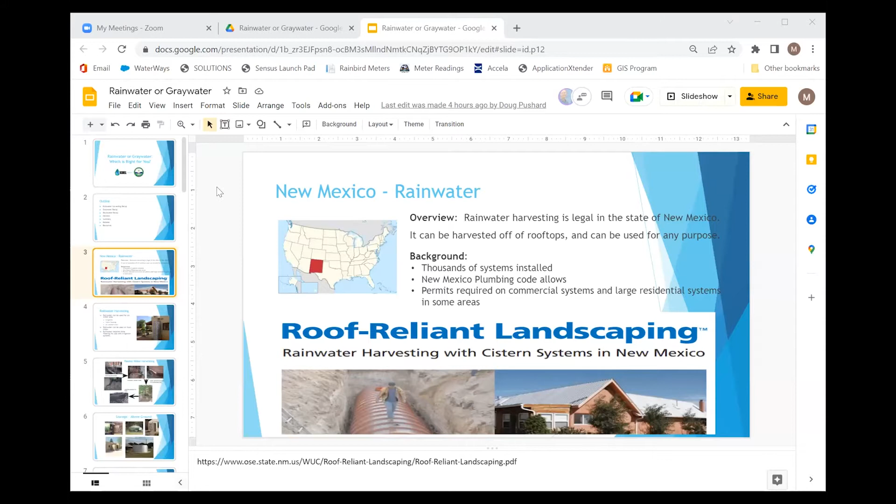My computer, can you hear me? Okay, I need to use my phone, Megan. Oh, I'm sorry, your audio is not coming through very clearly right now. I would suggest using your phone. Is that better? Oh, hold on, yes it is. If we can get rid of the echo. There we go, yes, the echo was on my side. Sorry. Okay, so would you like me to pull up the presentation, Doug? Yeah, I think it's going to be better that way, Megan, please. Okay, will do. And I apologize, we did this presentation on Thursday night, but we had a little timing issue in that we have the President of the United States here in Santa Fe, New Mexico, headed down your way, and when an event like that happens the bandwidth goes away. So we're having a bandwidth issue. So we'll start off.

Graywater, Rainwater, which is right for you. Megan, next slide, please.

We are going to talk, as Megan said, about rainwater. We're going to give a quick overview. We're going to talk about graywater. We are also going to talk about blackwater, even though it was not in the title of the session, because it's an important water reuse. We'll talk about the decision process summary, and then Megan will come back and talk about the programs, what's called rebates here, but what the programs are available to you if you're living in their service area. And then we'll finish up with resources and have time for questions.

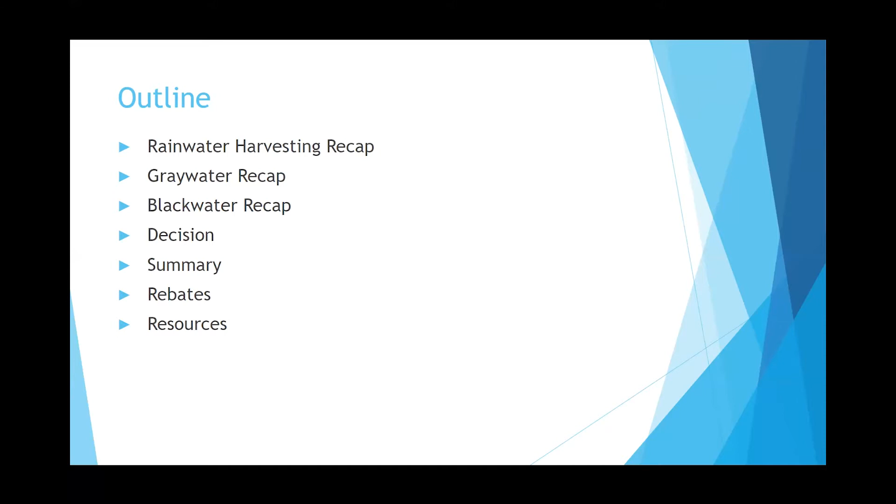Okay, New Mexico. We are very, very fortunate in New Mexico. I will repeat that statement. We are probably the best in the country when it comes to reuse regulations.

And rainwater, we start with rainwater. Rainwater is legal in the state, and we can use it in all various forms, for various uses. Of course, irrigation is the one that we all think about, but we have thousands and thousands of homes that rely on rainwater as their only source of water. They have no city water, no well water, only rainwater. We've got hundreds and hundreds of homes up in Taos, which gets about 7 inches of rain a year, for all their house use. So they're indoor, they're toilet flushing, bathing, dishes, as well as using irrigation. So we can use rainwater in all forms and fashions.

The roof-reliant landscaping that you see here on the bottom of the slide, that is one of the resources available to us in the state. It's published by the state, the Office of the State Engineer. We'll give you a link to it at the end of the presentation, but it's a valuable resource if you're thinking about doing larger rainwater systems. There are lots of resources, but that's a really good guide, and it's free.

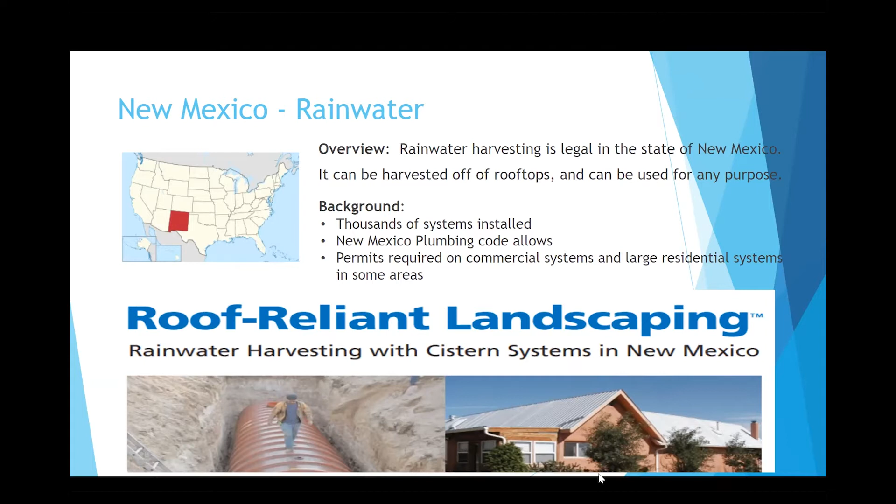As I mentioned, it can be used for all uses. The case study we're going to talk about a little bit later uses it for all indoor water. The reason why I emphasize that is because the water quality of rainwater is much greater than the quality of well water throughout most of the state. I have lots of clients where we'll do a well test and a rainwater test, and they'll always pick rainwater - there's no mineral in the rainwater whatsoever, and very little dirt coming off the roof into the tanks, so it actually is very clean.

It's very easy to use for toilet flushing if you can - it's a great source of water for that, but of course the primary use is irrigation. One of the questions we always get is, is rainwater safe for plants? The answer is yes, it's actually a great water source for irrigation, but it has no nutrients in it whatsoever. So if you're going to water a tomato plant strictly with rainwater, that plant will actually need fertilizer, because there is none in that water, versus other forms of water we'll talk about which do have nutrients.

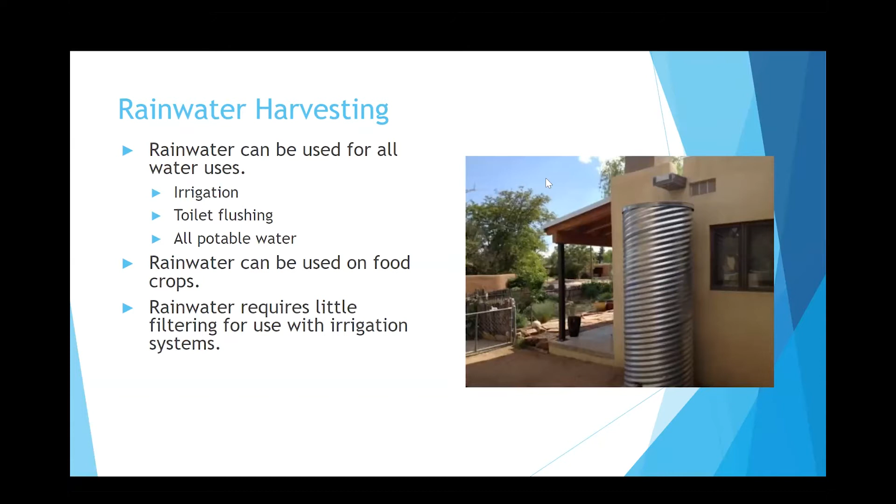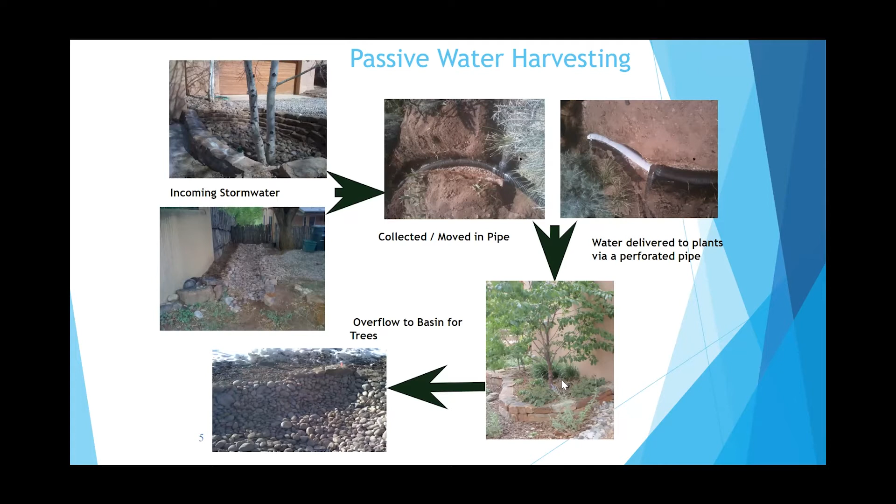You may do this with an irrigation system and then put plants like fruit trees where you want to give them extra water, or cottonwood trees where you want to give them extra water.

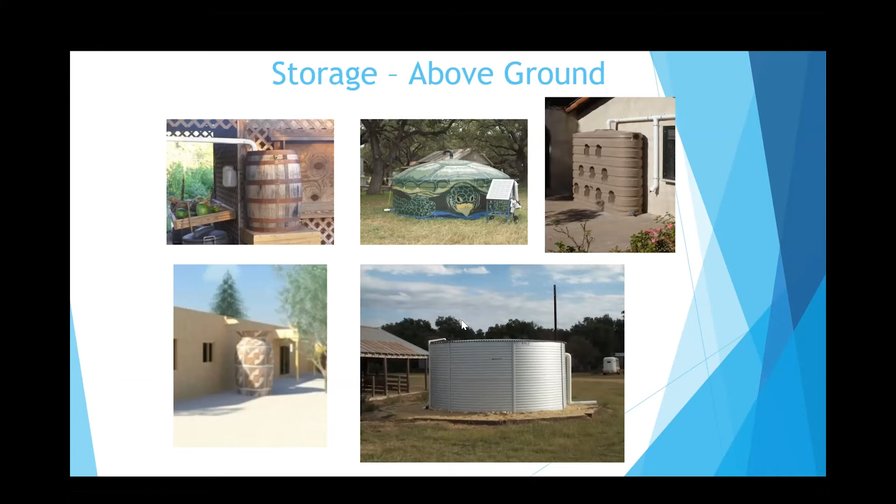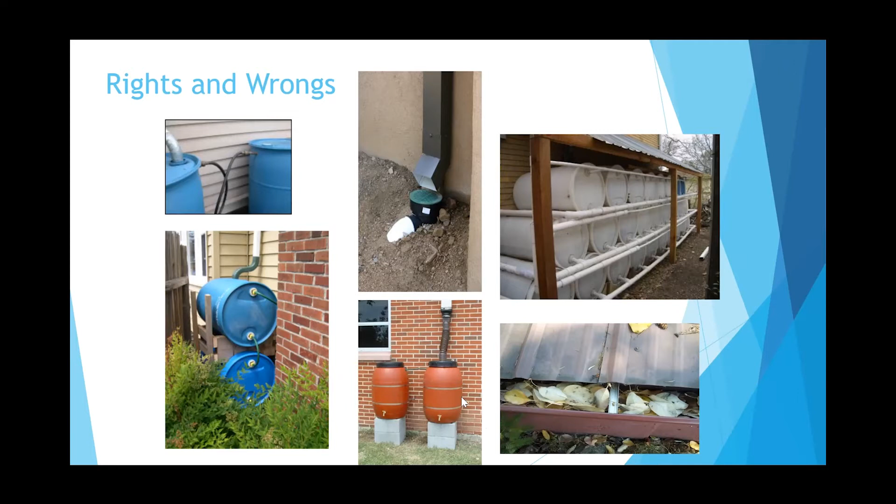The math behind rainwater systems is very simple. The number is 0.623—that's the amount of gallons you can catch per square foot of roof. You multiply that by your roof size, then multiply it by the rain you're able to get. So if we're taking a 12-inch annual normal and a 2,000 square foot roof, we're talking about almost 15,000 gallons. If we're looking at about 7 inches of rain, we're talking about 9,000 gallons—still a good amount of water. That amount of water, if it's 14,000, is probably going to last you 2 months of irrigation watering.

That's for a yard without grass. But that water is not going to be all available to you. Some of it will be lost due to inefficiencies in the systems—the type of downspouts you have, the type of roof, and if you have any guttering with leaks, you're going to lose some of that water. So you should always plan on capturing about 90% if you've got a good conveyance system to wherever you're going to take the water.

Now, I say square footage of roof—it's important to know that square footage could be a portal. In fact, greenhouses will sometimes drape plastic between them and catch rain off that plastic, channeling it to where they want to store the rainwater. So it doesn't have to be your house. It can be a portal, it can be wind shears, it could be plastic to help you capture that water. It doesn't need to be an expensive dwelling. In fact, the case study I'm going to show you in a few minutes, almost half the roof space is a portal. So it doesn't have to be the roof, but it has to be some structure that you're able to capture and harvest that water off of.

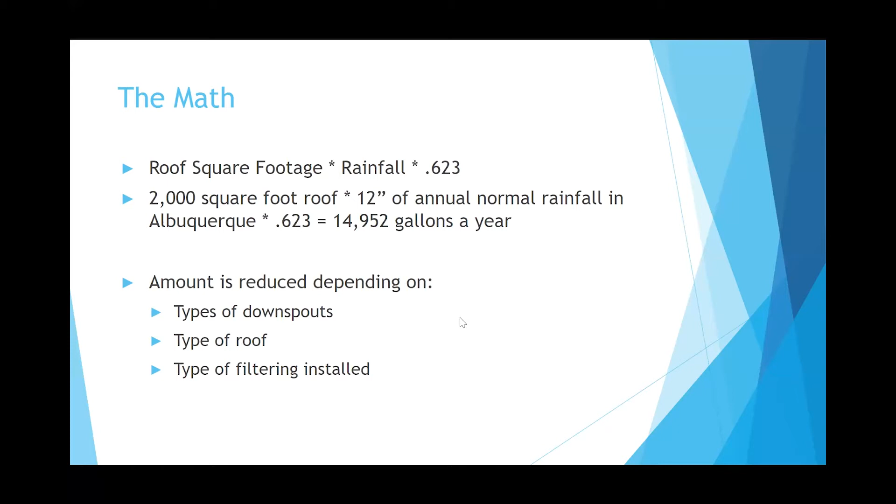Pros and cons: rainwater's biggest pro is that it is very, very clean. As I mentioned early on, when we're doing water tests of rainwater versus well water, rainwater is not even close—there's no minerals in it. Typically off a new roof, depending on the roof type, you may have some roofing material that gets into the rainwater, but over time the roof gets cleaned off. You'll have dust, but that dust is so minuscule compared to the amount of water, it doesn't really leach much into the rainwater.

It can be done inexpensively, and that's probably a key point. As I mentioned in some of the examples, I have clients capturing it off plastic tarps, so it does not have to be an expensive proposition.

As Megan mentioned, making your own rain barrels is a workshop I've done before, and it's always fun. You don't have to buy them, but Bernalillo, as Megan will show you, has some great opportunities, so there's no need to make them.

So for the widest use of water, you can use it for anything from irrigation, your garden, all the way up to drinking. It's an easy, clean source, and can be done in existing and new homes. And most importantly, the one we don't think about much, is it reduces stormwater effect.

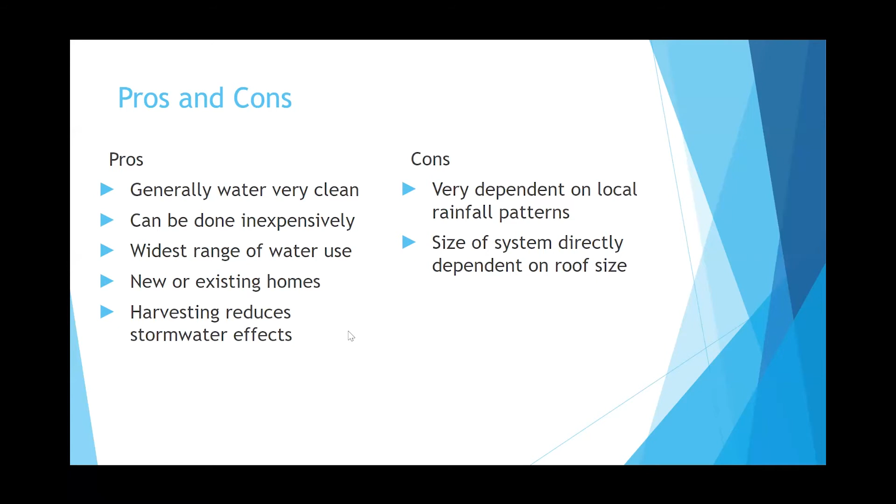Megan, next please. Any questions on rainwater, Megan, before I go to Graywater? There are no questions right now in the chat, Doug, so I did make a little plug to put them in there to everyone via the chat. If you all have questions as we go along, please put them in there and we'll get them answered. Thank you. Yes, and I should have said this is your session, so if you have questions, please don't hold them back. Let's take those questions, so this session is useful for you. You're taking your Saturday, a valuable Saturday, to learn about water and water reuse. Let's make sure it is worthwhile for your time. I really do mean that.

So we're now going to move, if there's no questions on rainwater, to Graywater. I said it before, we're very fortunate. Not only is it legal to capture and reuse Graywater, it's actually promoted in most places of the state to capture and reuse Graywater.

We have a state guide, this is in the resource section, you'll see it down at the bottom of this slide. It's a great guide put out by the state, showing lots of schematics of how you can capture and reuse your Graywater. If you're thinking about Graywater, I'd highly recommend you download this guide or run by one of the state offices and pick it up. It's a great little guide.

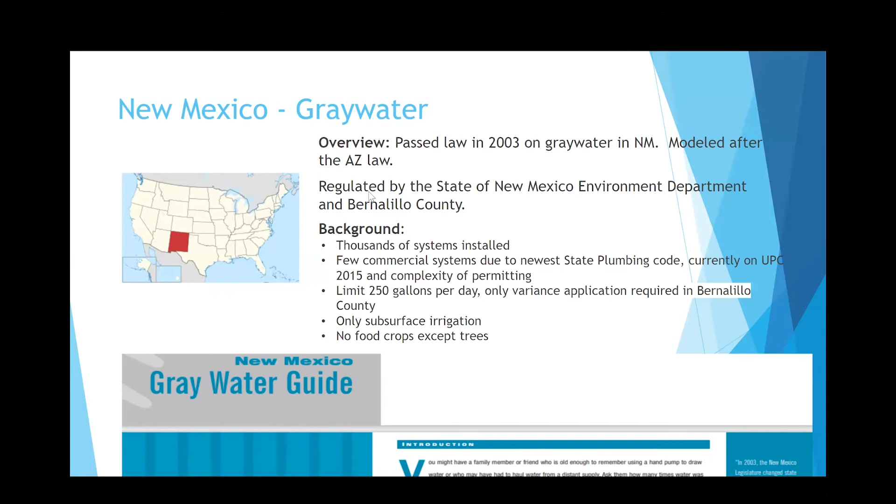Good question, though. Thank you. Okay, any other rainwater questions before I move on? Nothing further at this time.

Very, very simple system. A new clothes washer is still putting out 10 gallons every load. An older clothes washer, probably 7 to 8 years old, you're putting out up to 30 gallons. So it's a lot of water that can be put out depending on the household and number of times you're using it. And it's very predictable, because you're going to have to wash clothes, and that water now goes to your yard. It's got lots of good nutrients in it.

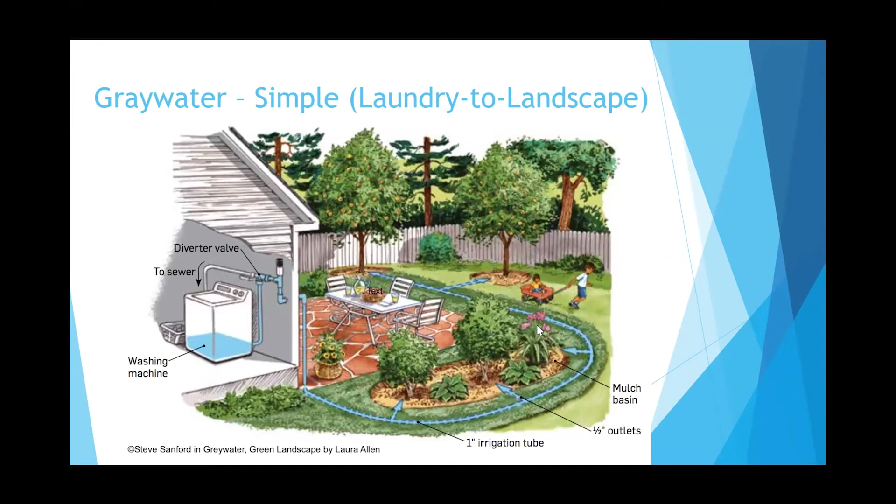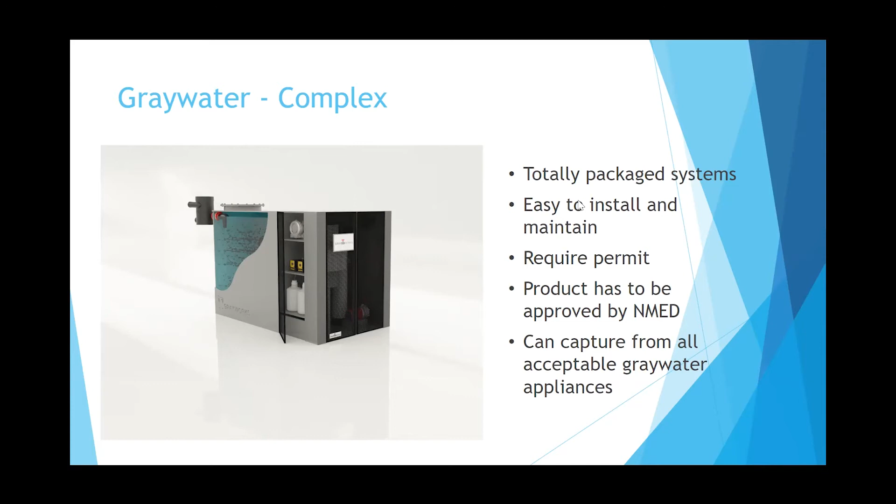To put it into perspective on gallons used, we are currently at around 120, like 126 right now in Bernalillo, which is a good number. In Santa Fe we're a little under 90 to put it in perspective. We don't have as much grass here, and that's gallons per day in a household per person. We have much less grass and a lot more drip systems up here in Santa Fe, and that's one of the big differences.

One of the questions we get is about skepticism that we can continue to go down, so I want to put it in perspective. A lot of Europe is in the 70s, and they've been doing gray water and rainwater systems for decades. Unfortunately, these types of systems I'm showing a picture of are brand new to the United States.

They do require a permit if you're going to install one of these systems, but they cut down the maintenance and you'll have no smell with them. So it's a great option if you're going to build a brand new house and you want to utilize gray water as one of your water reuse sources.

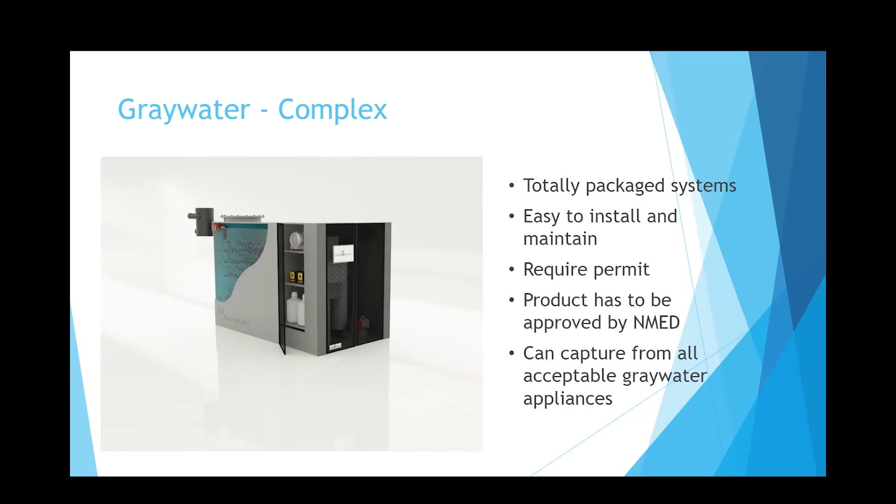Gray water is predictable. You're going to have a set amount of gray water almost every week throughout the year, so it's a great source of water. I'll show you how much shortly. It can be done inexpensively if we're talking about the laundry to landscape system - it's an inexpensive weekend project, and there's a class on that we'll talk about. It's a great source of irrigation water with great nutrients in it. It does have bacteria, and bacteria is very good for your plants.

A laundry to landscape system can be put in new or existing homes. When we come to the more complex systems where we're trying to do all gray water, that's going to be hard in an existing home unless you've got a crawl space and a basement - it'll be very difficult in an existing home.

Cons: it does have bacteria in it, and it's very active bacteria, so you have to be cautious in using and handling it. That's why it should be used only in subsurface irrigation systems with at least 2 to 4 inches of mulch coverage, so animals aren't digging in it and children aren't touching that water. It's not healthy if you have any open sores, so it does have a health risk associated with it. It can smell if not properly maintained - if you smell it, it means something is wrong.

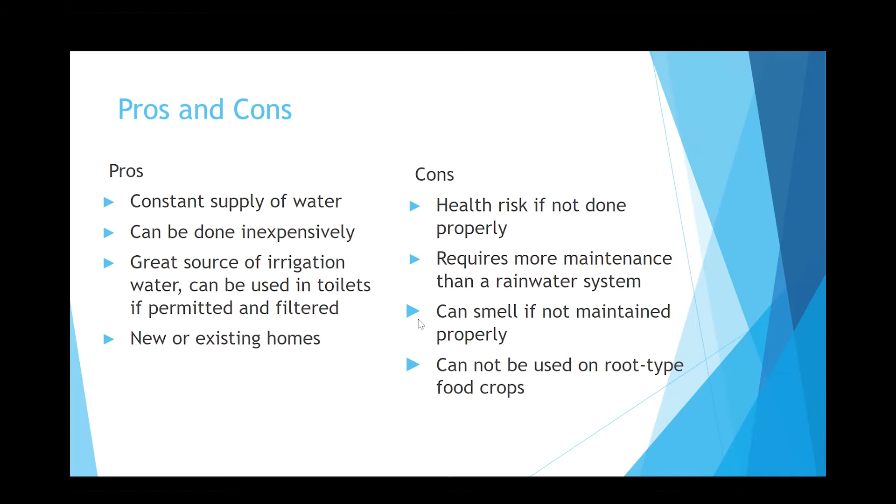So one of the things I'd like you to think about is blackwater. We are very fortunate in this state in that we allow rainwater, graywater, and blackwater. We are the best state in the country when it comes to water reuse. We have the best ordinances and statutes in place. We've got a lot of very professional people in all these different markets that can help you reuse this water. That is not the case in most states around the country, where they really look at water reuse as a negative, not a positive.

We have a very active blackwater reuse program. We've got literally thousands and thousands of these systems installed in the state. It's very simple to upgrade an existing septic system to a water reuse system. They're called advanced treatment systems in the state. So if you're going to call the environmental department or call Megan, you'd be asking them about advanced treatment systems.

It's simply turning your septic system, which has a drain field called the leach field, into a subsurface irrigation system. So instead of sending the water out to a leach field, you send it to a subsurface irrigation system, and that irrigation water can be used on your trees. I highly, highly recommend it if you've got any type of vegetation that's flowering.

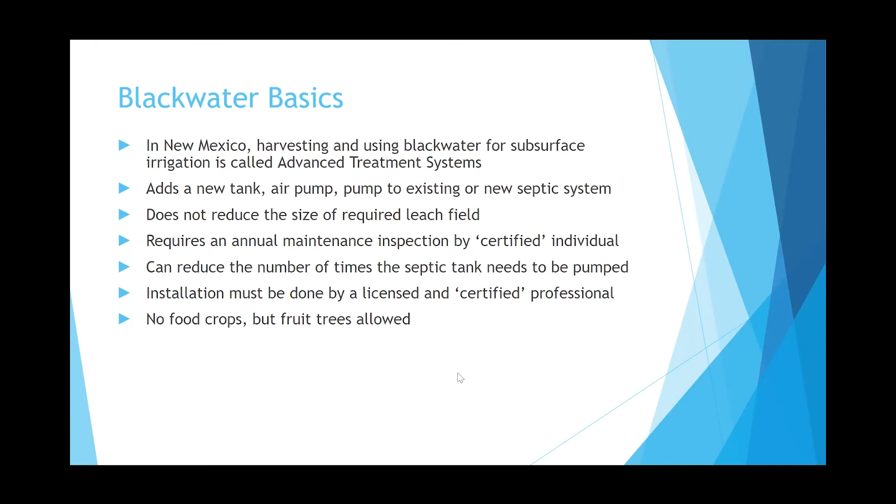Pros and cons of black water. As you'll see, a lot of water comes out of a house as black water. In the state, it could dramatically improve our water situation if we could get to gray water, black water, and water reuse. Black water is a great source, especially if you're on a well and you're irrigating. You could use black water, and that would be a great way of reducing your pumping of that well. It can be done on new or existing homes.

Can actually meet the water -- we'll show you the math here in a sec -- can meet the water requirements of most houses, your irrigation water requirements. Again, like gray water, it does have a health risk, so it has to be subsurface, and has to be installed by somebody that's certified, meaning they've taken a class and taken a test. It's not a hard process, but there is a process the state allows and Bernalillo recognizes.

It can smell if not properly maintained. And then, of course, it is limited on the type of crops. Megan, please.

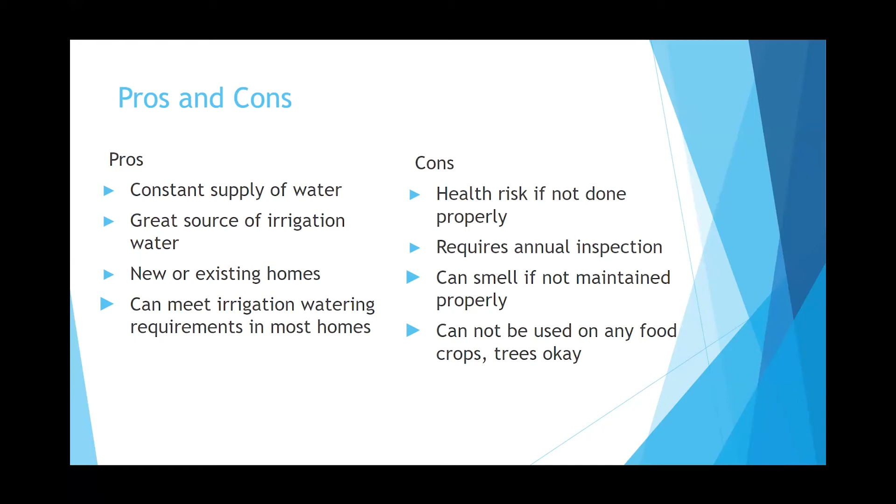This gives you an idea of the gallonage -- on the next chart I'll give you the math. We're talking that if every person did gray water alone, which is the easy way to go, you could do a whole house and you're talking about reducing 7,000 gallons, and we could do it on every house in New Mexico. We're talking tens of millions of gallons we would be saving just by moving to gray water. So even though we're in a drought, probably one of the most severe we've had in 1,000 years, which may continue for the foreseeable future, we have lots of water and lots of water options, even if we're not getting rain.

In some installations, as I'll show you in the case study, it's highly recommended you pick two of these. So you may want to do laundry to landscape and large rain barrels, because we still do get precipitation -- we got winter snow, we will probably continue to get precipitation. The storms are just going to be larger and less frequent. Megan, next, please.

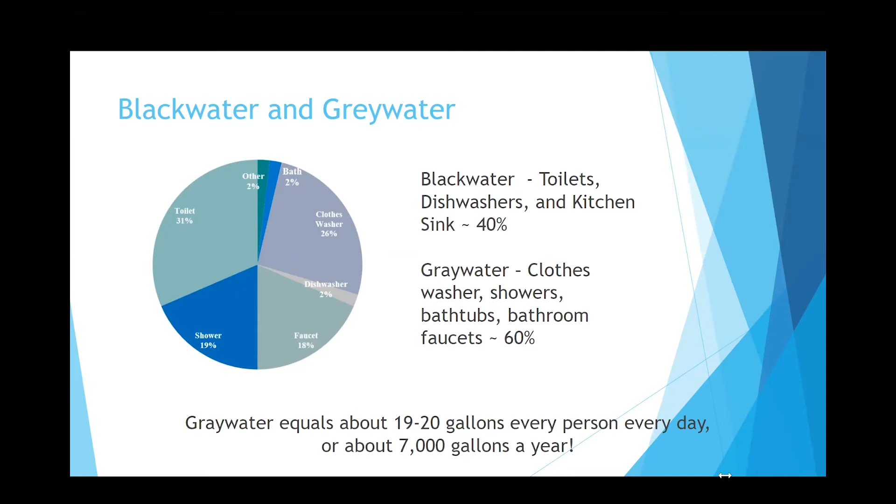So the math you can see on gray water -- this was a 2,000 square foot home again, but now we're doing the math by bedrooms, because that's how the plumbing code does it. Math for both gray water and black water is based on the bedrooms, not square footage, and there's a lot of reasons why we do it this way. But it's very predictable, so if a household gets sold, the next person may produce more gray water or less gray water, but the state has a model to predict how much should be coming out of each home.

So a 3-bedroom home would produce 40 gallons per day. You've got 2 people in the first bedroom, then 1 person for each additional bedroom. It's a 3-bedroom house, times 40, times 365, so it's 58,000 gallons. Black water is the same calculation, but it's 75 gallons, so you'd see in a black water household you'd be producing about 110,000 gallons.

In Bernalillo, they do the math slightly different. It's 75 gallons for 2 people, so they're doing it by the bedroom -- 2 people in the first, and then 75 gallons for each additional bedroom. That's black water. And then you multiply that number by 60% to get the amount of gray water that you would produce. And I have to tell you, these numbers will give you a high production.

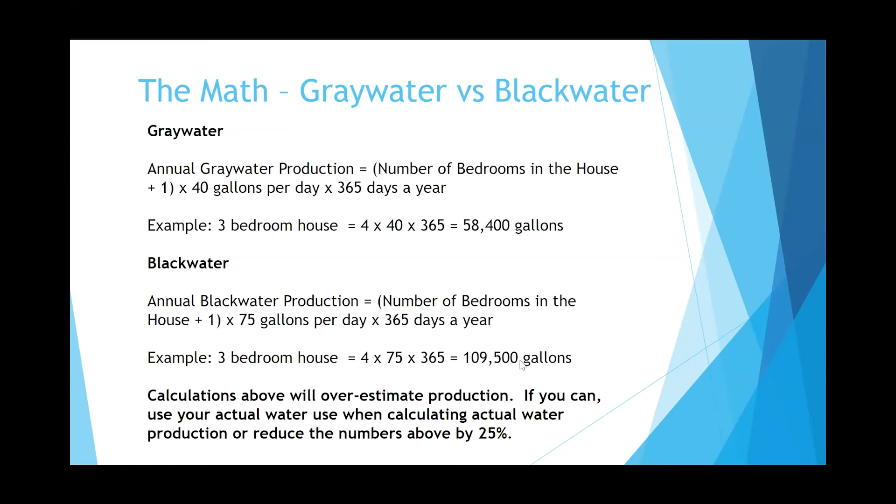Okay, so this is one that just finished. We have clients all over the state. This one's north of Santa Fe, a large house, 4,600 square feet. As I mentioned, the portal is on the backside of this house, almost the whole backside. It's a huge portal, and it allows us to capture a lot of rain off the portal. It's a 3-bedroom house, and it gets around 12 inches of rain in that area.

You can see it's got over 200 plants, so it's by no means desert. It does have some pine trees. The trees you see in the front are non-producing pear trees - they have a colorful blossom in springtime but don't produce fruit. It's got lots of grasses, as you can see in the front on the driveway, and a wide assortment of plants. The shade you see, the sun coming through the trees, is actually some pine trees on the east side of the house to block the neighbor, so you're not seeing the neighbor or the neighbor's not seeing you.

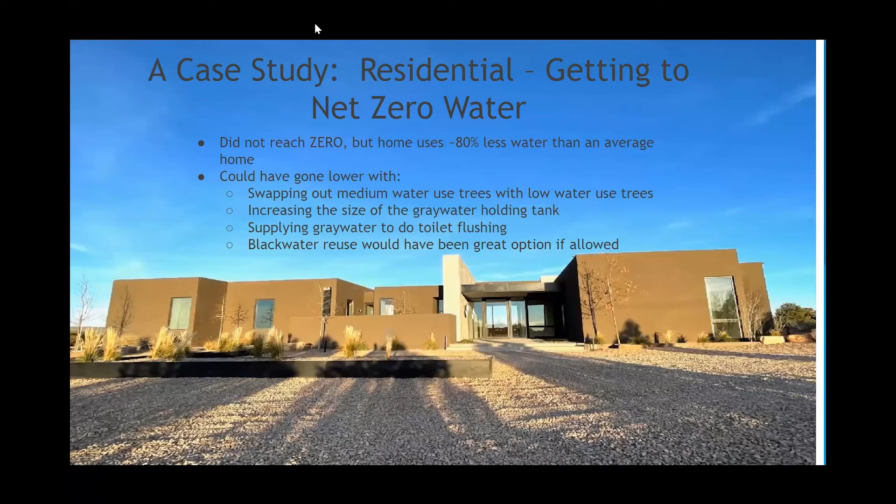And if we're getting houses to net zero water, that means we can build and not worry about our water supply. It's not water that's going to be our problem.

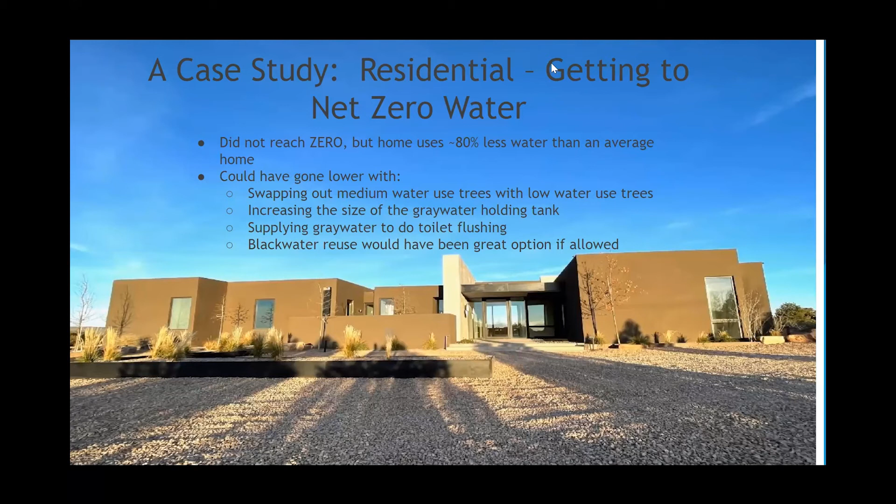So when we're looking at rainwater, gray water, and black water, I think you probably know I'm a broken record. Rainwater is the best quality. It is fabulous from a water quality perspective. It has no nutrients, so if you're going to use it solely for irrigation, you will have to apply some fertilizer, because it is going to take that fertilizer out of the soil over time. Unlike black water and gray water, which are really nutrient rich and have live bacteria—good for your plants, but a health risk—you need to make sure your maintenance is ongoing, and that the black water system especially is looked after by a professional, or you've gotten the training to do that.

Rainwater, gray water, you have some low-end solutions that literally the county—Megan's going to talk about—and they are not expensive at all to do.

When we look at it from an energy standpoint, rainwater is probably #1. Most site visits I go to, we end up using 2 water sources. We use acequia water, we use well water, we use every source of water we possibly can to cut down well water or potable water use. That's what the objective is, to cut down the use, because we don't need to be using as much water as we are.

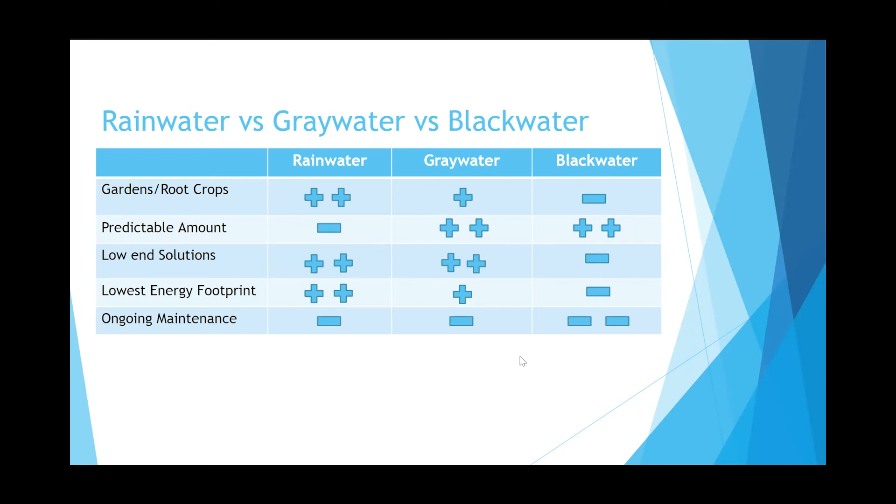So the things to remember, you can fix this before you start doing water reuse. There are simple things you can do. You have leaking aerators, or you can replace your aerators. It's going to cut down your water footprint, and doing these things will reduce the cost of any water reuse system.

In the energy sector, they basically say if you can spend $1 on conserving energy, you're going to save $10 on your photovoltaic system. That math, although there's been no study done in the water sector, is probably about the same. So if you were thinking about upgrading, you want to do rainwater catchment, and you want to look at your irrigation system, look at your plants. Do they need to be fixed? Does your irrigation system need to be fixed to make it more efficient?

There are classes that you can take. Passive before active—you're going to have passive if you're going to do large tanks, because you're going to have an overflow.

0.623 is the magic number when you're looking at rainwater catchment; you have the math in the presentation for the other ones. They are really based on the number of bedrooms, but your water bill, or your water meter, is going to be your best guide. We do live in a land of freezing weather, so just be careful if you're going to put in something—avoid the north side of the house.

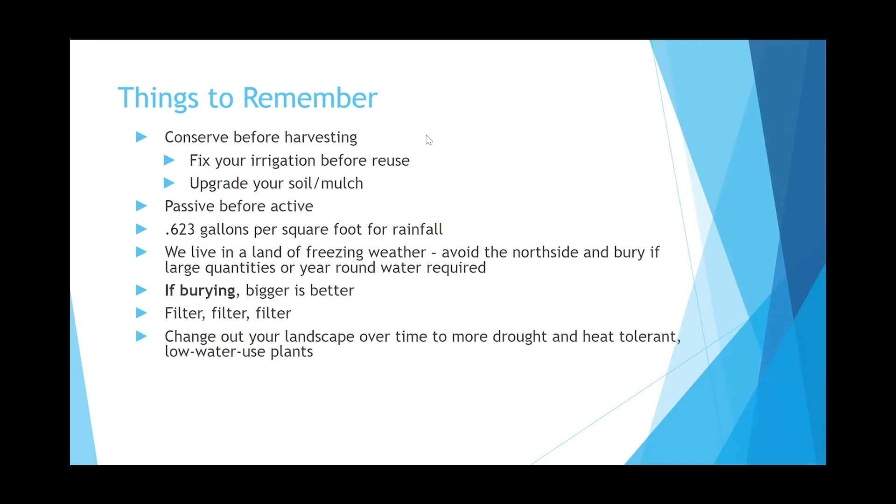Before I wrap up, we're going to talk about one more thing, and that's backflow prevention. Every one of these systems we talked about can actually be connected to another water system. If you're going to do that, it will require a permit.

This is a picture of a backflow preventer. It allows us to tie city water to a rainwater system, or city water to a graywater system, or to a blackwater system to make up water if those systems run low—your blackwater system should never be empty. But if it is, give it makeup water to allow it to be used for irrigation, because those may be your primary source. So these will require a permit, and they will have to be installed by a plumber. They provide a measure of health, not just for you, but for all your neighbors and the community you live in. Extremely important.

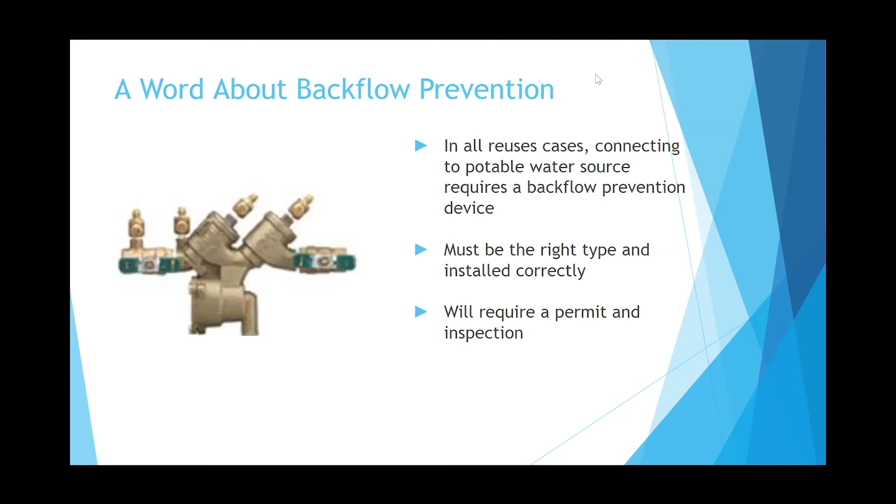Wrapping up: fix it first. Next, think about where you want to use your water. If it's going to be inside, for toilet flushing, you can use graywater or rainwater. If it's going to be the whole house, it's only going to be rainwater. If it's irrigation, you have lots of choices on what you could use.

Please start—that's the first message. And if you don't know, just start small. Megan's going to talk about a couple of the options that they offer. There are a lot of ways just to start small. Just start and do something.

Passive systems, if you can, are a great option for rain. Look at your lot when it's raining, see where the water's running off, and see if there's any way you can keep that water on your lot. There is maintenance with every one of these systems you pick up, whether it's a rain barrel, an L2L system, a complete drinking water system, or a blackwater system. There is maintenance. And we're also fortunate that we have lots of professionals who know how to do these systems, and we have some great people that work at Bernalillo that are more than willing to give you their time to help you move forward.

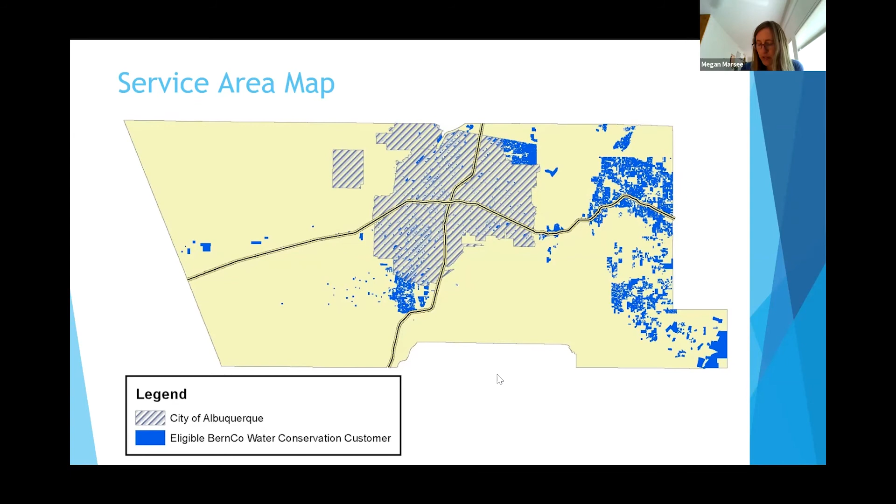We went through the process in the 2019-2020 timeframe of updating our water conservation incentive programs, and we took quite a bit of public input when we wanted to make changes to these programs as part of our 5-year water conservation plan update. These were the 6 programs that we introduced—we actually had 2 of them already, and we just expanded those programs and then added 4 additional ones.

So what we offer today is smart water monitors. For those who might not be familiar with this relatively new technology, these are essentially like flow meters that measure the water usage in your home but communicate that data to your smartphone. They not only measure your whole house water usage, but can actually disaggregate your water usage and help you understand it by fixture type. This was a water conservation incentive of great interest to the private well owners in our service area who otherwise have no other means of measuring their water usage. So we offered those.

I think the rest are pretty self-explanatory: high efficiency toilet retrofits, so taking high water use toilets out of service and replacing them with high efficiency toilets, high efficiency washing machines, smart irrigation controllers, and then we have a rainwater harvesting and our laundry-to-landscape graywater program.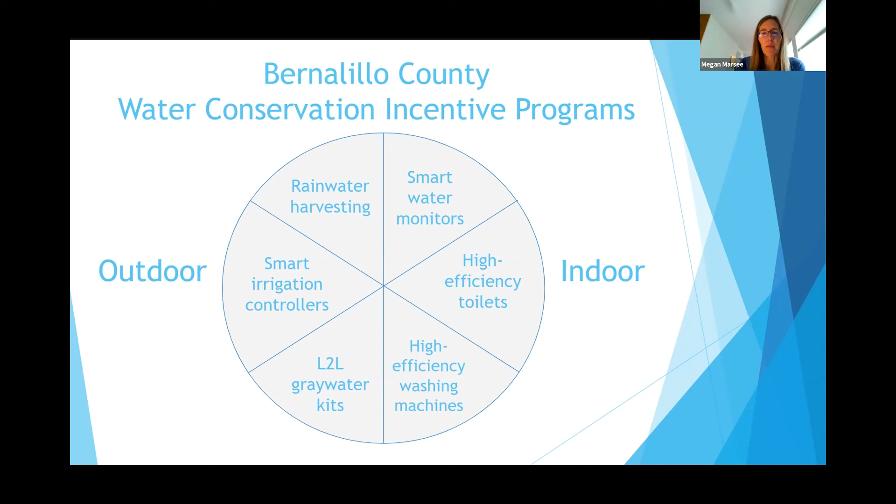And those are the 2 I'm going to focus on telling you about. We've actually long had a rainwater harvesting program, but what we did very recently, at the beginning of this year, is expand that program to include larger rain barrels. So you can choose between getting 2 free 55-gallon rain barrels, or a subsidized 200-gallon rain barrel, or a 360-gallon rain barrel. I also want to note that when we did our water conservation plan update, we committed, again with public input, to looking into incentivizing passive water harvesting features. So that's something we'll be looking at in the future.

Earlier this week, we launched a new laundry to landscape graywater program. There were lots of people in our service area interested in graywater. As Doug mentioned, when you have an existing home, these water conservation incentive programs target existing homeowners and support them with water conservation retrofits. This is the simplest system you can do as a retrofit.

For this program, we partnered with the Watershed Management Group located in Tucson, Arizona. Some of you may know them. They're really a regional leader in rainwater harvesting and graywater. They have a graywater incentive program that they run for Tucson water customers and have been doing so for a number of years. So we purchased, by and large, their kits and made a couple of adjustments to them, and purchased some of the larger parts locally.

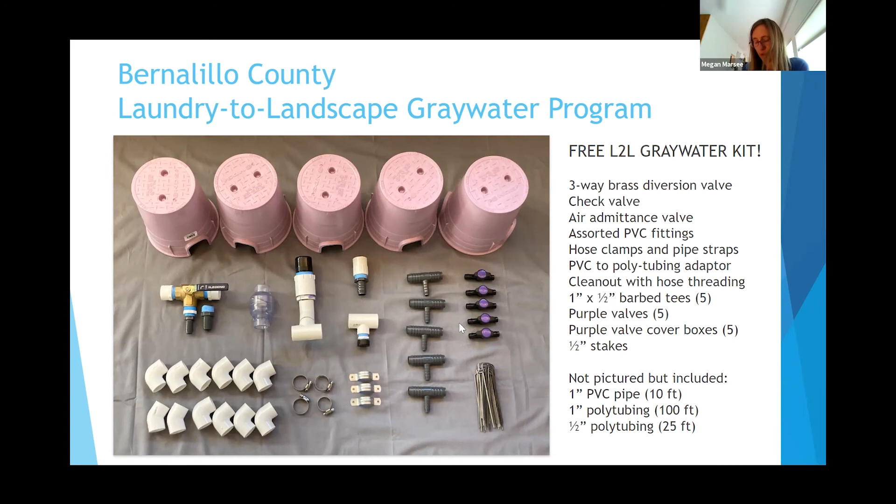When you get a laundry to landscape graywater kit from us, you also get and are required to take a free laundry to landscape graywater for homeowners class. Doug actually designed, developed, and recorded this class for us. It's based on the Qualified Water Efficient Landscaper Graywater Certification class. So it's very comprehensive, but what he did was modify that to make it specific for laundry to landscape systems.

He also provides a tour of a graywater system—maybe it's one or two tours, Doug—that were installed in Santa Fe. If you participate in the program, you also get a free 30-minute phone or video consultation with a graywater expert to answer your questions as you actually install your system. So just a little bit of technical support.